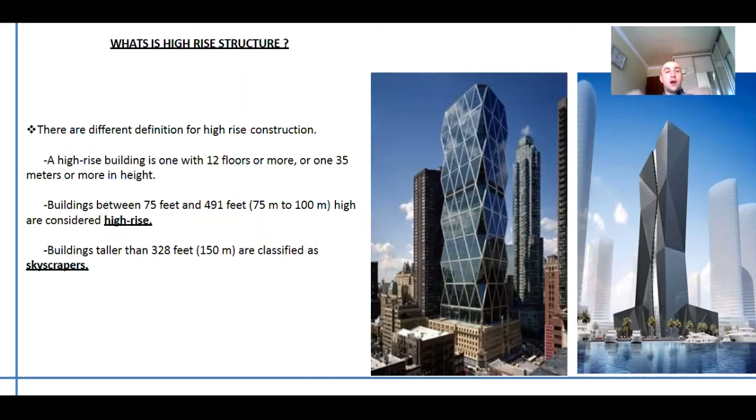Studies often ensure that pedestrian wind comfort and wind danger concerns are addressed. In order to allow less exposure, transmit more daylight to the ground, and appear more slender, many high-rises have a design with setbacks.

Large scale urban centers have entered the 21st century with the paradox of discussing the demand for skyscrapers. As cities touch the sky with their growing skyscrapers, they also reach out to attract and embrace as many people as possible, aiming to become an important financial, commercial, cultural, technological, or touristic place, and therefore attract investment.

So they need to grow. The more cities grow, the more people are needed to make it grow. With more people, more infrastructure is necessary in big cities with big populations. On this going trend, tall buildings and skyscrapers appear both as protagonists or antagonists.

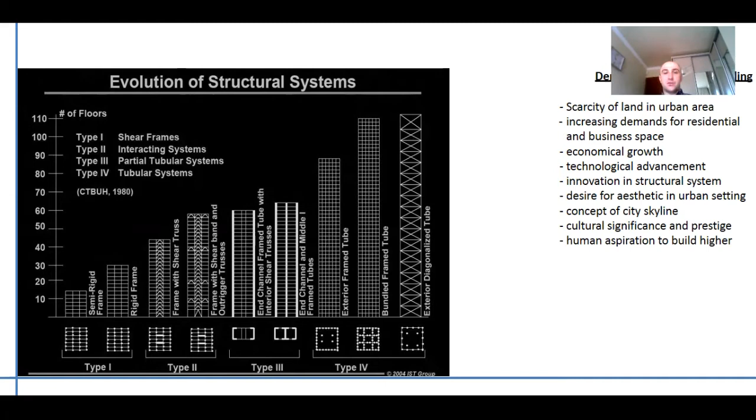That's very important. If we look at the main materials applied for the construction of high-rise buildings, we'll find there are not so many types of materials applied for construction, but some of them are more popular than others. The vast majority of residential high-rise buildings are actually built from reinforced concrete.

Some very early buildings used bricks and concrete combination, and most modern buildings have a higher proportion of steel work, but concrete remains the standard material. Other elements may include brick block work, metal work, glass, plastic, internal cladding, aluminium, polyvinyl chloride, cladding skin, fiber, and so on. So concrete and steel have long been the primary materials for constructing skyscrapers.

But in recent years, engineers and architects have started experimenting with new and often surprising materials in response to the sustainability of cities. Actually, there are modern materials which are also very durable in comparison with steel and concrete.

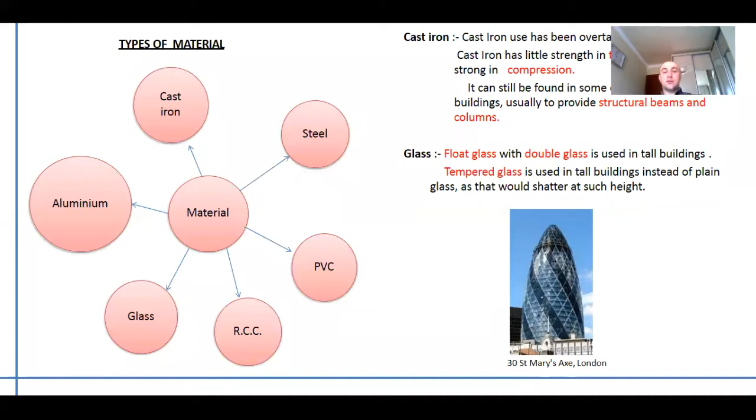Concrete, or reinforced concrete, is an incredibly strong man-made mixture of aggregates, sand and gravel, cement and water, that have been used in construction since Roman times.

For the last century, steel reinforcing wire or rebars has been embedded within the concrete slab to overcome these weaknesses. The steel can be placed under tension either before pouring (pretension reinforced concrete) or after curing (post-tension reinforced concrete). Non-tensioned steel reinforced mesh can also be added to add strength over large surface area slabs.

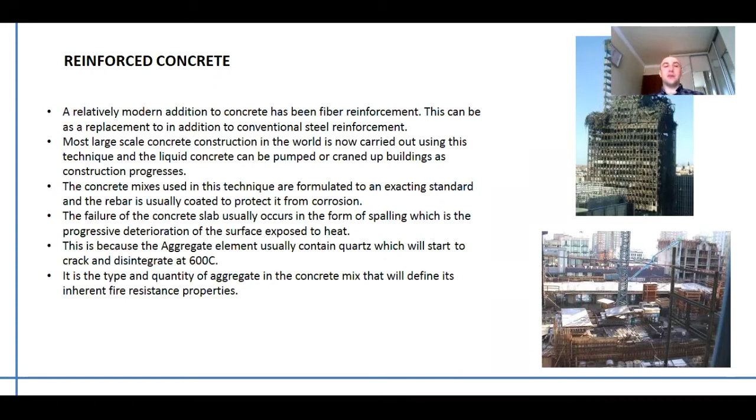Glass - what about glass? Glass is a hard but brittle substance, usually transparent, made by fusing silicates under higher temperatures with soda, lime, etc. It's brittle and does not stand higher impact, but its tensile strength can be 5 times that of the best steel.

This higher strength and the development of modern glass construction techniques means that new high-rise buildings use large quantities of glass as walling, usually supported by steel frames. These techniques are seldom used in residential accommodations, but all windows will be glass held by a variety of framing materials.

Its melting point is normally about 1,400 to 1,600 degrees, so in some glasses it is lower. But exposure to higher temperatures will cause it to soften and lose strength rapidly.

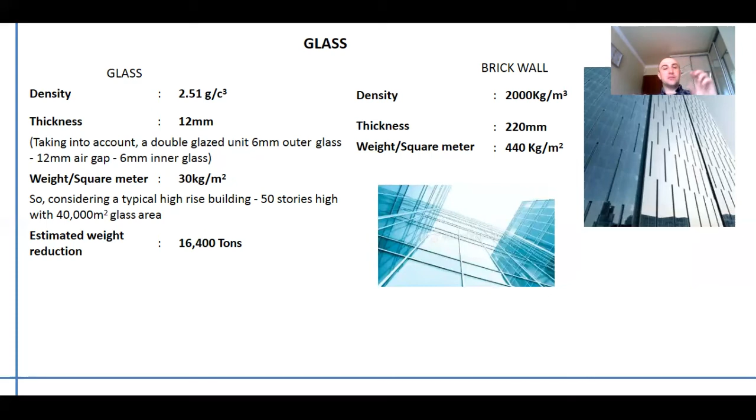Next one is steel. Steel is extensively used for all forms of construction and is present in nearly every form of reinforced concrete. Steel is a metal, whose major component is iron. Carbon is added, and this acts as a hardener.

Different mixtures of steel are used. We see that it loses strength at 600 degrees, so the beam can lose two-thirds of its strength.

So what will happen if it loses strength? Strength loss can be found in the ductility of the steel, and this can lead to buckling. The buckling can be local, so maybe it will not be so dangerous, but when the buckling becomes general, of course it can lead to big problems - it can lead to the failure of the whole building.

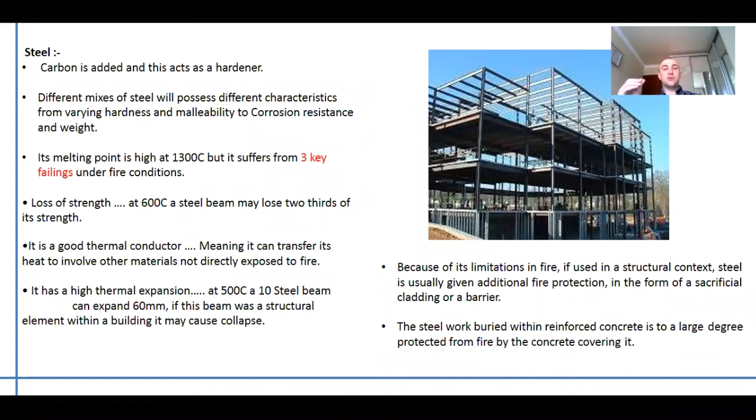Fire crews see it as a key safety point at high-rise buildings that structures still pose serious failure risks - while the failure of an individual beam may not cause collapse, it's indicative that the building structure is being compromised.

Next one is aluminium. Aluminium is actually a relatively soft, lightweight material. It has a melting point of about 660 degrees.

Aluminium is used not for bearing purposes but for additional purposes, for example in combination with glass. It can be a bearing material for finishing tall buildings with glass cladding. Glassing of tall buildings cannot exist without supporting materials, and this support can be provided by aluminium.

Aluminium can be a framing material for these purposes. According to its melting point, it also should be protected by special cladding materials, by concreting, and by other barriers to protect from falling hazards and fire problems in buildings.

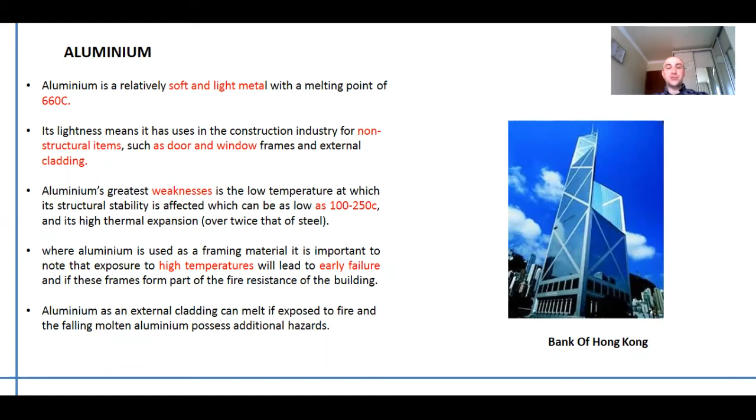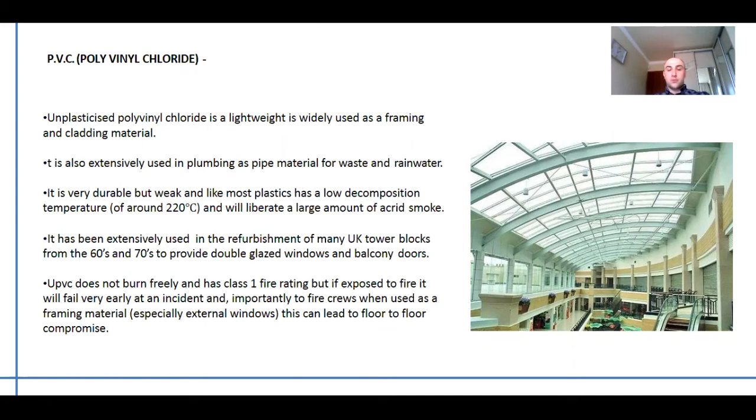Now we've finished talking about the materials used for construction of high-rise buildings. Next we're going to talk about loads acting on high-rise buildings. Loads can be divided according to their action positions into vertical loads, horizontal loads, and unexpected loads. What about vertical loads?

Dead loads arise from the weight of the individual construction elements and the finishing loads. Also under vertical loads, we can mention live loads. Live loads depend on the number of stories.

Live loads can be reduced for load transfer in the dimensioning of vertical and bearing elements. However, the reduction of total live load on a construction element may not exceed 40%. What about horizontal loads?

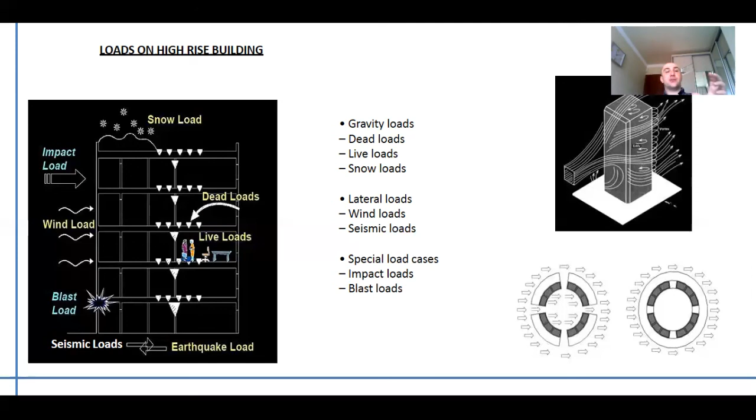Another cause is uneven settling of the foundation on its non-homogeneous soil. Any deflection produces additional lateral forces, like wind.

Wind tunnel experiments are used to see the influence of the building's shape on wind load. The ability of wind loads to bring a building to sway must also be kept in mind. This acceleration leads both to perceptible lateral acceleration for occupants and to maximum lateral deflections.

In accordance with wind loads, another horizontal load is the earthquake. Seismology is the word which relates to the earthquake - it has two definitions.

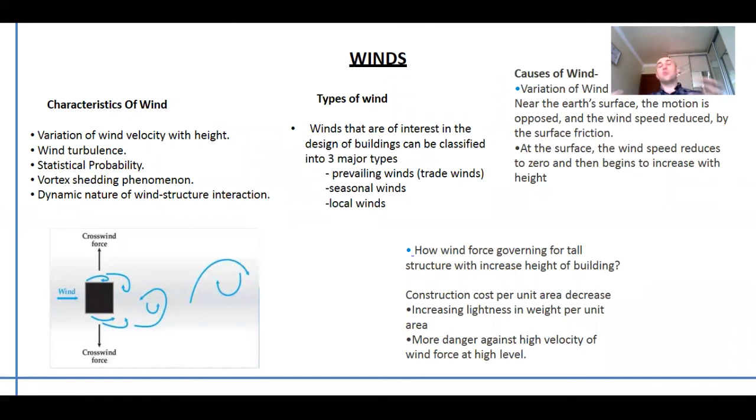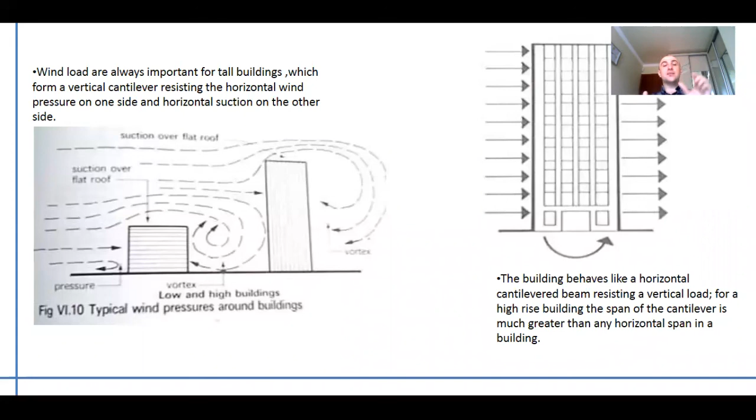For example, shear waves - secondary waves - travel more slowly than P waves and thus appear later in the seismogram. Their particle motion is perpendicular to the direction of the wave. Shear waves do not exist in fluids such as air or water.